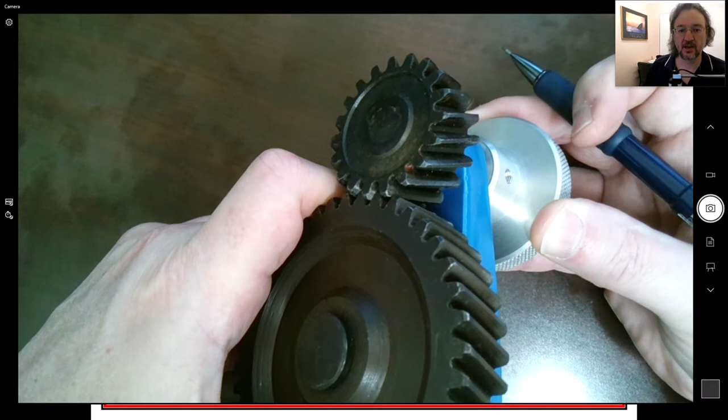We can see that it's rolling along, and it forms a diagonal line, right? At any given point, there's this diagonal line across this face right here, as it starts to come down. It doesn't go straight across, it comes down. And so it starts to roll downwards right in there. So there's more of this rolling action that's taking place. So it's like the smoother transition.

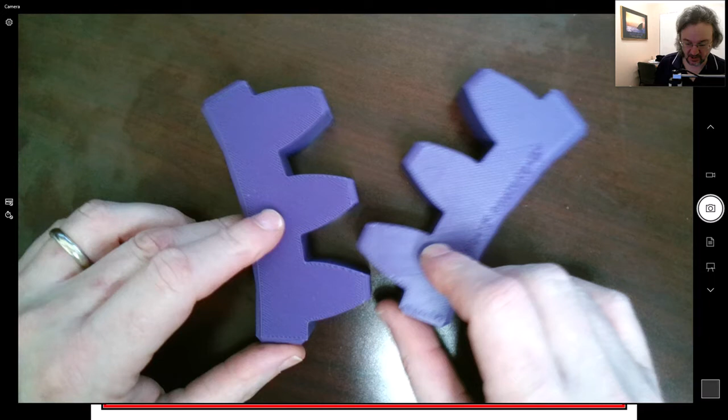Now, if you contrast that with our finger puppets here, when this thing engages, it engages at a full line, and it touches and rolls in here. So there's going to be this slapping that takes place. And that slapping can cause noise. And as there's more torque being applied, by the way, these teeth bend, and then it has a tendency to slap even more, because the distance between teeth has changed when these previous ones have allowed for some deflection and then the new ones are about to engage, right?

So it's here, let me see. These ones are bending right here. So when these ones finally get in, they can slap against each other and cause noise and impacts. So that's why the helical gear is quieter, right? It's making this transition. Instead of slapping against it, it's rolling. It's rolling from the side onto it.

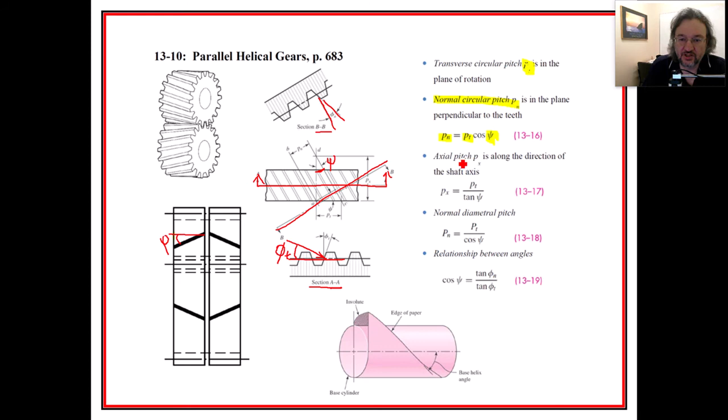And this other one is the normal one. Or sorry, that's from taking in this right here. So you can see there's a relationship between those two. So now we have an axial pitch and a transverse pitch and a normal pitch that we could take a look at, and we could see the relationship between the axial circular pitch and the transverse circular pitch is this right here. And if we wanted to get the normal diametral pitch, they are also related to each other by way of this.

So the direction in terms of whether it's transverse, normal, or axial, it's really the transverse that we would associate with the spur gears, and then the others are ones that we need to consider because of it being a helical gear. You could also see, with these angles, here is the interrelationship of them if you needed to find them. So if you have two of them, you know the other one is basically here.

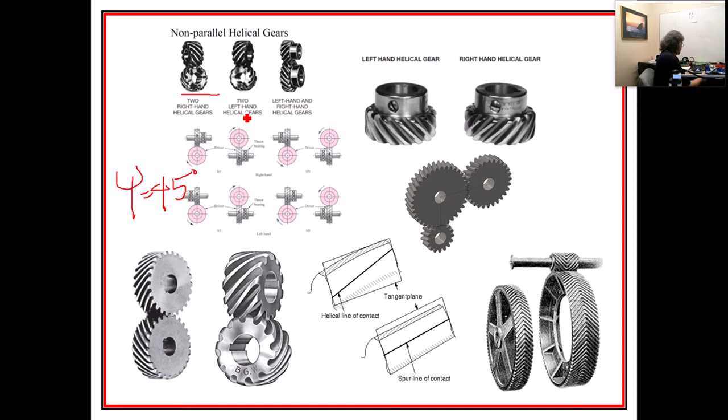Some other things that are kind of interesting: the helical gears can actually be put together 90 degrees from each other. I keep trying to find a pair that's going to be just right, but I think this can only be done if they have a helical angle of 45 degrees, right? And by the way, I think they both have to be either right hand or left hand. So I have a couple here, and I wanted to try this out. I don't want to bring these to class because I don't want them damaged. I potentially could use them in my gearbox downstairs.

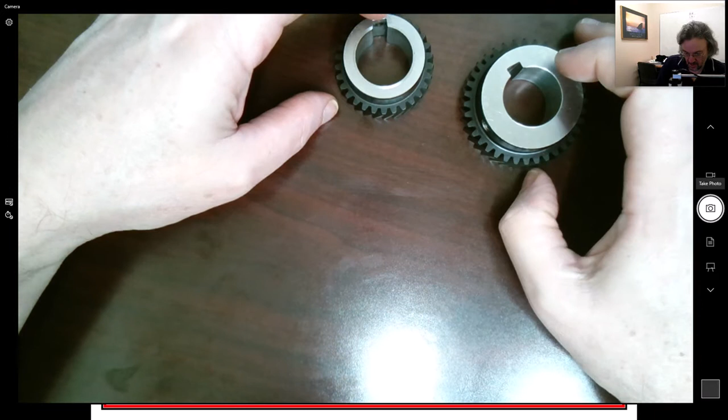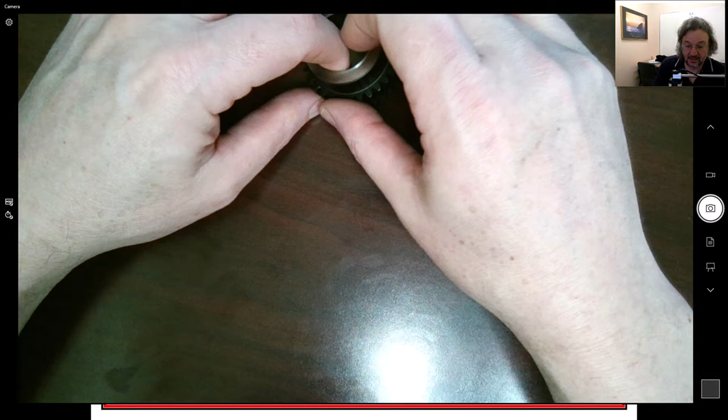So here are two different pinions, and both of them are right-handed. How do I know? Well, they're leaning to the right, right? So if you take a look at this, I gotta be really careful, I don't want to damage the pen. If you set it down and you look at it, you can see that the teeth are leaning to the right. So these are both right hand. So you can put these together.

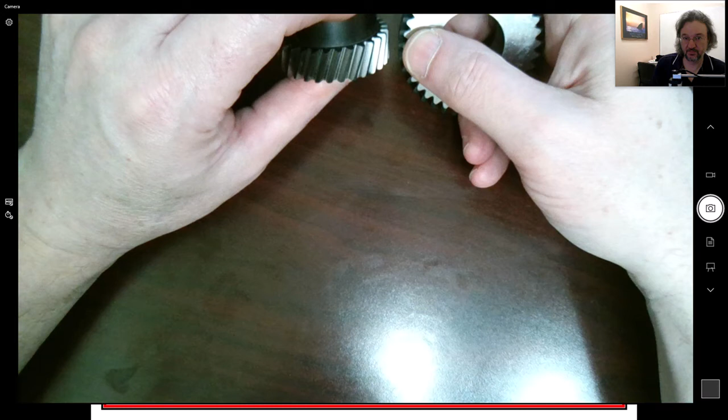You can see now the shafts would not be 90 degrees from each other because these don't have a helical angle of 45. But I think if they had a helical of 45, we'd actually be able to get these shafts to be 90 degrees from each other, which is kind of interesting. There'd be a lot of sliding taking place right there, very similar to the worm gear or even a bevel gear, more like the worm gear kind of operation.

But anyway, you couldn't run these gears in this configuration, I'm pretty certain, because they kind of run off of each other. Maybe you could, but I think there'd be a lot of sliding. There's probably a lot of sliding anytime you have that configuration. But I think it's an interesting application.

So right here you can see this is the left-hand gear and this is the right-hand gear. And here's the line of contact as I described for a helical gear, whereas this is the line of contact for a spur gear. And because of this lean and this axial thing taking place, there's an axial thrust component to the forces, similar to what I described in the bevel gears.

And I probably should introduce the helical gears first, go through an example and then go to the bevel gears, because the bevel gears are more specialized, whereas the helical gears are much more common.

Because of that, a lot of times it's nice to have two connected to each other, or even just build them this way, where we could have two pairs where one's left-handed, one's right-handed, of course, and they're mating. And by the way, you need a left-handed and a right-handed to be able to have a standard configuration, right? They need to be able to.

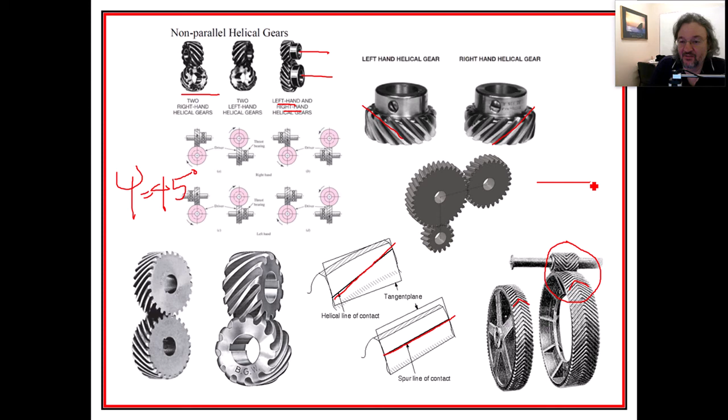But now what we could do, we'd have what we call a herringbone right there. So I guess like the herring, like a fish, would have bones. A fish looks like this right here. Maybe there's the fish head, and here's the bones of the fish. And here's the tail fin right there. So there you go. And here's a sad fish because he just got eaten, right? But that's the herringbone pattern right there.

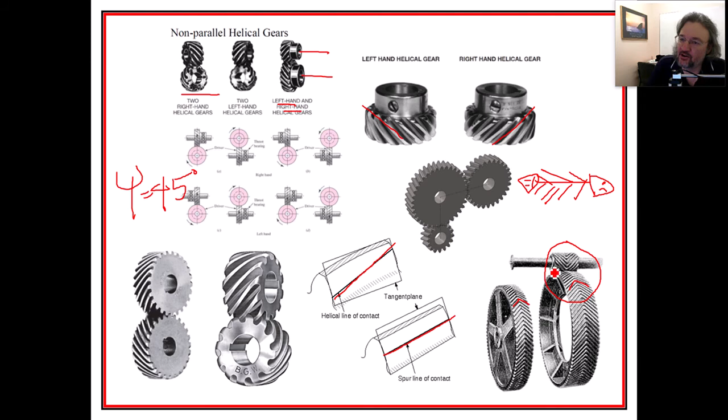So quite often that's the thing that we want to try to find. When we find the torque from the horsepower and the RPM, we find that transmitted load, also called the tangential component. They're one and the same. And then we can find the others from the angles.

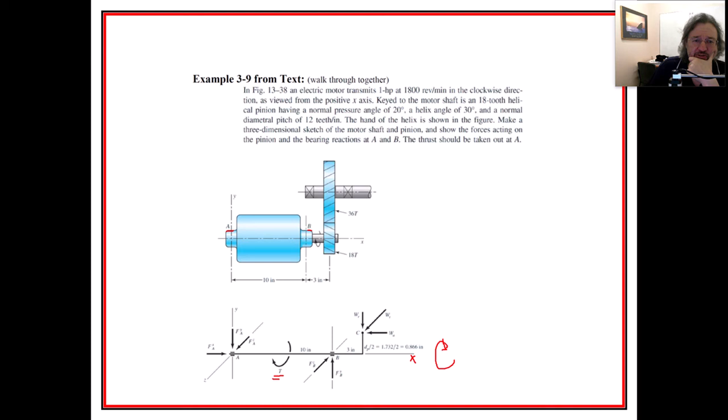So these are the slides that come with the Shigley book. Here's the 18 teeth, here's the dimensions. Some of the first things we want to do: we were told the pressure angle was 20 degrees, and with the helix angle we could find the tangential, or the transverse. I hate that we came up with all these different names. I think we're going to call it the transverse because we're using the lowercase there. They're saying this is the transverse one right here.

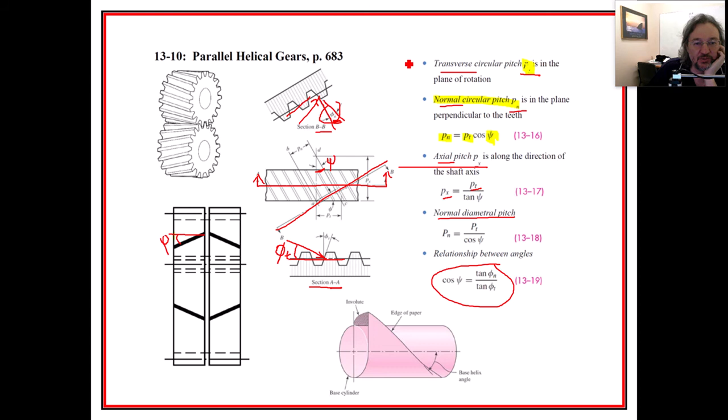Interesting to me. That really seems backwards to me. No, maybe. Okay, wait a minute. I will buy that. I think I spoke out of turn in the previous. I'm not going to fix it. But yeah, here would be the one that we would care about right here, right? So that's like the pressure angle. The normal one is the pressure angle. Hopefully in class I will say it correctly.

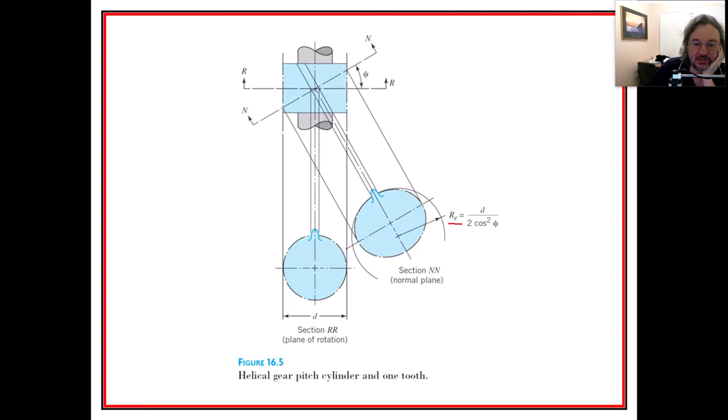So anyway, let's see. We found the transverse by taking this right here. Let's see which equation did we use as part of that. We used this equation right in here to be able to find it. So that's their go-to equation. So we're going to find it as 22.8 degrees, and then we can also find the pitch right here. So we were given that it was 12 in the normal direction. So the transverse direction has this 10.39 teeth per inch.

Therefore, the pitch diameter is going to be, we take the number of teeth 18 and divide it by that transverse pitch, and we have 1.732. And so the pitch line velocity uses that and with the 1800, and then we're able to find 816 feet per minute. So the transmitted load, now we're able to find from this equation of 33,000 times the horsepower divided by the pitch line velocity.

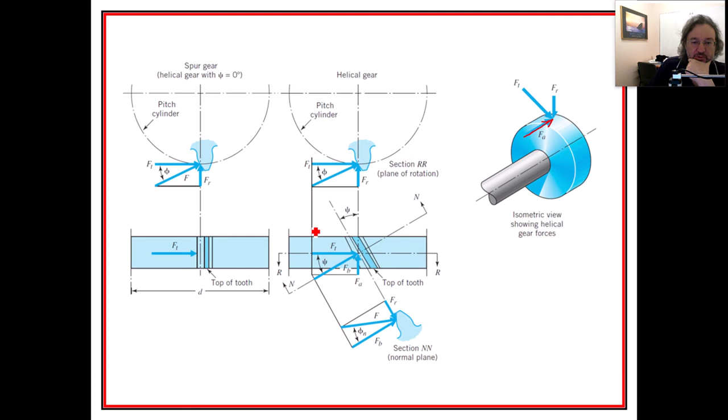And now once we have that load, the all-important load right there, we're able to find the other loads, right? We're able to find what the radial is and what the axial is going to be. So we have all of those values right in here, and we also have the total if we wanted to. So this is almost a quasi three-dimension right there. It's an isometric.

But this does give us the big picture right here of what all of these loads are going to be. And this torque right here, by the way, that's internal to the motor, right? So that torque is being electromagnetically applied to this shaft to turn the thing around. And then this line right here is just to represent where the gear is, right up to the point of contact that we're making between the two gear faces right here.

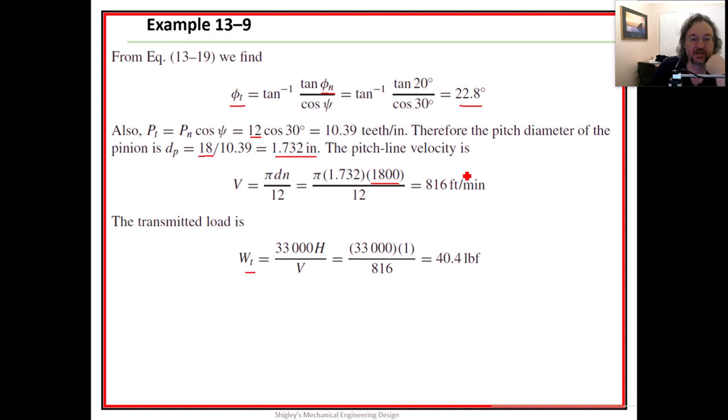So with these three forces right here, we're able to take the moments about the z-axis. So we take it about A basically, and we don't do the cross product like we did in the bevel gear. They went ahead and did a cross product, and in here all we did is just take the sum of the moments. We would take the sum of the moments, and we're able to find out what FBY is going to be right here.

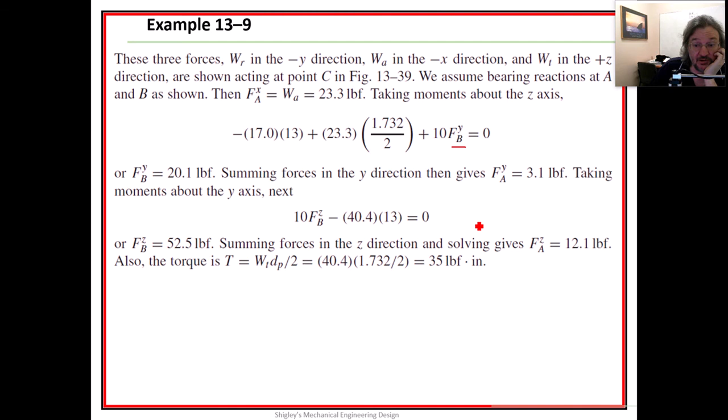And so we were able to walk through piece by piece and get what these reactions are going to be, and be able to figure out what the torque is going to be, although we could have just taken power divided by the RPM, but we should have been able to find this all anyway, but we can confirm it at least.

And actually they do it with vectors, right? Okay, so they accomplish this with vectors, where they make this into a force vector, and then they figure out where the position vectors are in B and C. And then they write out here's the thing that they're trying to find, and once they do the cross products, they're able to solve the I's. Let's see, they solve the

we already knew what the torque was going to be. Okay, so that's why they're doing the torque about the I, but they're able to solve for the K with the K, and the J with the J, and then be able to find the force, and then write what the force is at A, right? So here's the reaction force at A.

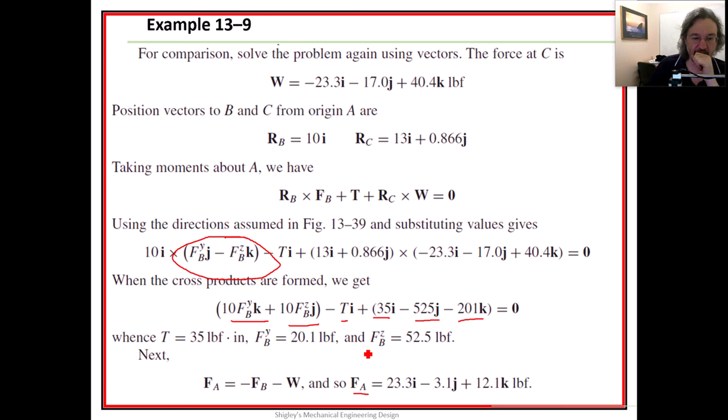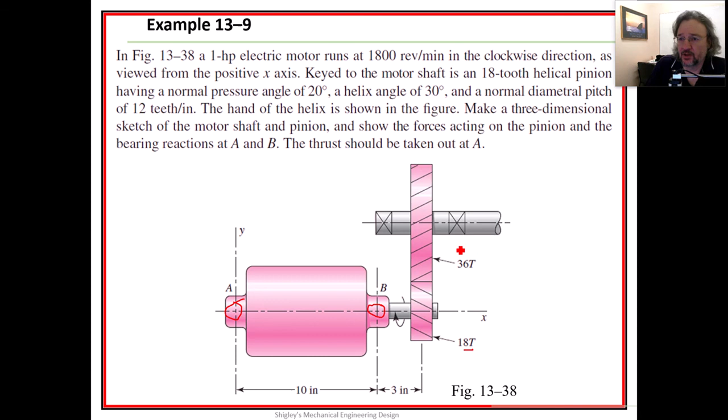So that was our goal, and part of this is to find out what the reactions were at A and what the reactions are at B, so that we can size our bearings, which we're going to do in a class coming up very soon. So that's just another method of doing it: you could work off the free body diagram, or you could also use the vectors to try to get the answer.

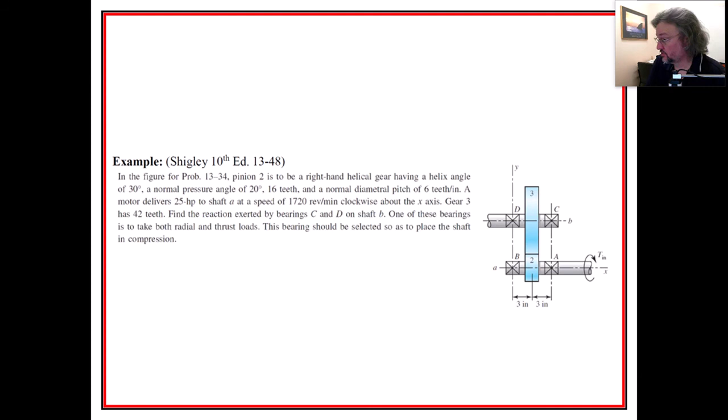So I have another example, and I might do that one in class and leave this video for consumption. So hopefully this was of some use. It's the longest video, but maybe I'll be able to use it sometime in the future.